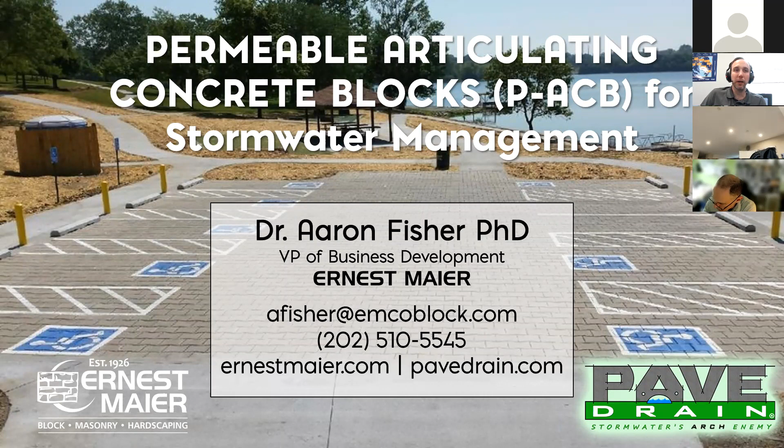My name is Aaron Fisher. I am the Vice President of Business Development here at Ernest Maier. Today's talk will be on permeable articulating concrete blocks for stormwater management. This is a tool that should be in your toolbox as you look to address stormwater challenges as part of your site plans, as part of your stormwater management plans. If you're not looking and thinking about permeable articulating concrete blocks, you should be.

I'd like to start though quickly with who is Ernest Maier. As our tagline aptly suggests, we are more than just blocks. So if you know us as a masonry supply house, we certainly do that and do that well, but that is not the only thing we do, and that is not the only place. We've expanded well beyond our Bladensburg headquarters, all up and down the mid-Atlantic, out to Charlottesville and out to the beaches, operating under a few different names.

We do everything now from ready mix concrete, to precast concrete, to brick masonry, to hardscaping, to one of our latest products we just picked up, fiberglass rebar. You might think that would be more expensive, but it's actually cheaper right now than steel rebar. It's a superior product at a lower cost. So if you're concerned about corrosion, or any of the things that happened in Florida last year unfortunately, where corrosion was the problem, a rebar that does not corrode would certainly be one way to solve a problem like that. Any of those products, anything that interests you, please feel free to reach out. We're always introducing new products, not just because they're interesting or exciting, but because they're better, they're more sustainable. That's how we got into permeable articulating concrete blocks, which we sell under the name Pave Drain.

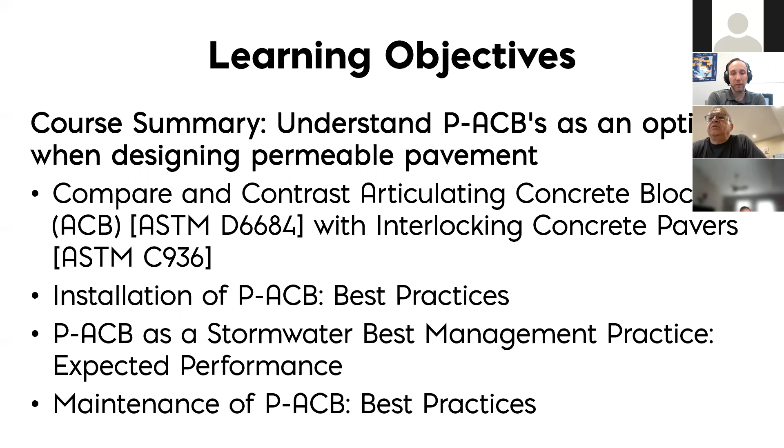I also like to talk about the learning objectives. This is the last introductory slide, so what should you walk away with? Understanding that P-ACBs, permeable articulating concrete blocks, are an option when designing permeable pavement, but also an option when you're thinking about addressing your stormwater challenges. First I start out by comparing and contrasting what an articulating concrete block is to an interlocking concrete paver, which is probably the product you're most familiar with. Then how best to install this, what you should expect in terms of performance, and then maintenance. This is really the big one, so we save it nice to the end, hopefully you stick around to hear that piece.

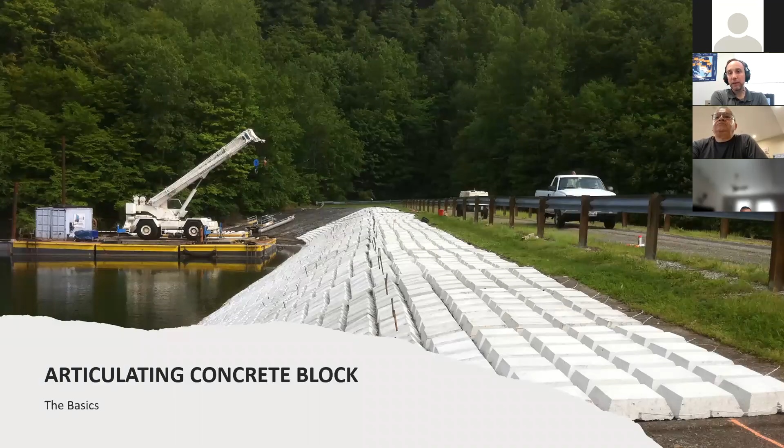Starting off with the basics, what is an articulating concrete block? It is a matrix of interconnected concrete block units. They interlock in one of three ways: either based upon the geometry, so the shape of the block, cables, so that's a system that runs through the blocks, or geofabric, so something that kind of sits on them. Think of it like a Lego board, you can kind of plug them in. The key thing is they form a hard yet pervious surface via open joints. That open joint is really the key thing here. That joint is how the water gets from the surface to the soil and ultimately back into the water cycle.

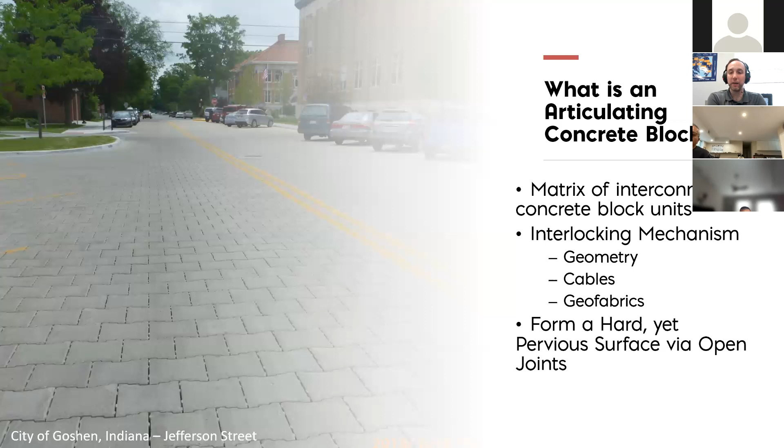So there's a difference in thickness. An articulating concrete block is about 5.5 inches thick. A paver is between 2.5 to 3.25 inches thick. So there's a little bit of difference there, but they're similar, not far off. They're both made from concrete, so any color you can make concrete, you can make a paver, you can make an ACB. They both form that hard yet permeable surface to prevent erosion.

I will stress that when the systems fail, it is generally not exactly the surface that's causing the problem. It's the things below the surface. So compaction, geofabrics, that are all really critical to making sure that the system performs like you're expecting.

And then finally, that stone base, that's really the stormwater structure. So the gravel underneath, the stone underneath is actually what holds the water and allows it to infiltrate into the soil. That allows you to disconnect from the stormwater system and allows the stormwater to actually go back into the natural water cycle where it would in a distributed fashion.

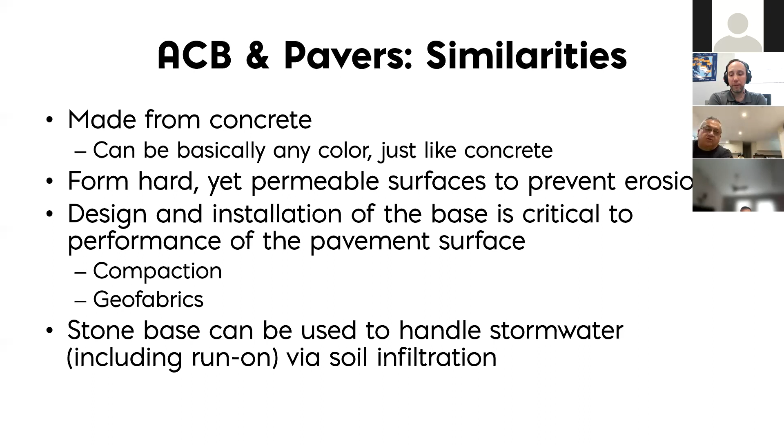But why are they different? So the answer is 2 different ASTM standards. So if you do specify an ASTM standard, you do scope out ACB systems. So please be sure to give it kind of an 'or equal.'

The joints, this is really the big one. ACB systems have open joints, so there is no material in the joints. There's no sand, there's no stone, there's no crushed rock, nothing in the joints. Whereas pavers require material in the joints. This is really big because this kind of changes how much water they take on, but also changes how maintenance is performed, how they clog. All of those kinds of things change pretty dramatically when you have the joints filled, which we affectionately call that pre-clog. So that really starts the clogging process.

Additionally, the ACB systems are interlocked. They're always interlocked, that is how those systems are set up. Pavers are sometimes interlocked, and that's when you have a herringbone pattern that generates that interlocking, and is generally recommended when you have traffic applications. So when you have cars driving on them, you do need that additional strength from that.

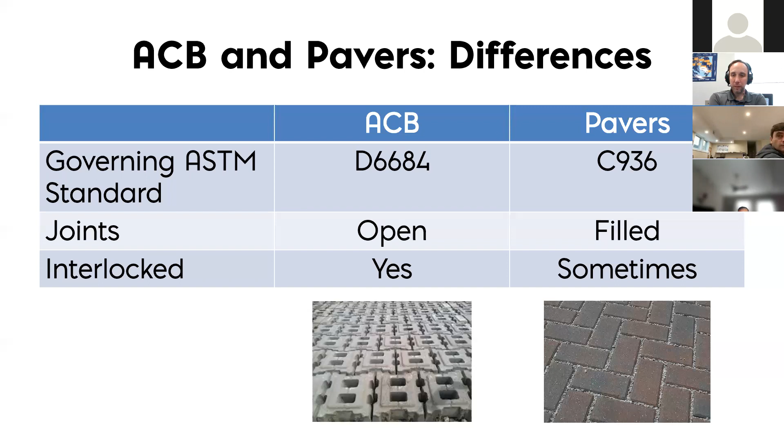So the difference is open joints may not seem like a really revolutionary idea. We really think it's not, but it generates a lot of different performance characteristics. The blocks tend to be stronger because they're much bigger. Because there's a little bit more material, there's a little bit of a higher price point to them, but you certainly gain in the long run in terms of maintenance very quickly.

Performance-wise, these systems perform much higher initially and then perform much better over the whole life of the project, even in the absence of maintenance. When you do have to perform maintenance, it is much simpler, it is much easier, and generally results in restoring significant performance back to these systems that greatly exceeds what you would get from an interlocking concrete paver system.

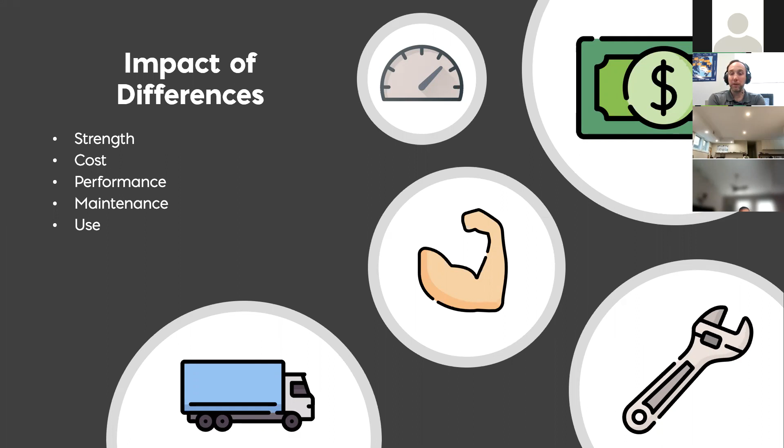And ultimately the use case: ACB systems can be used under heavy traffic loading. You can put them in a drive aisle, you can put trucks on them, you can put cranes on them. We have a whole bunch of pictures for this and we'll stress that and talk through that.

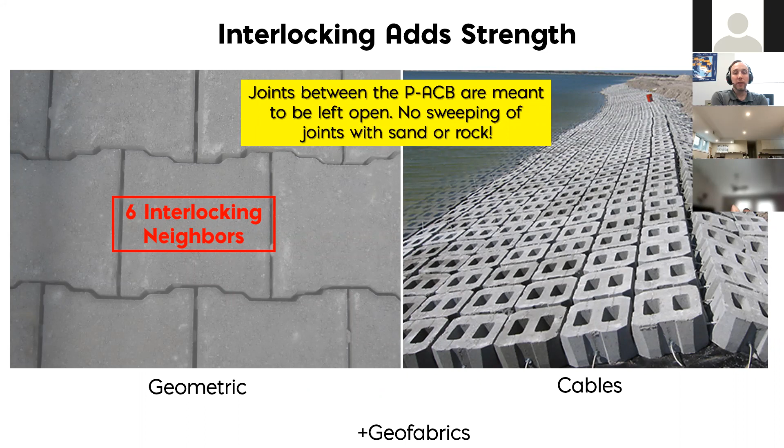I will also note the interlocking adds strength. So the joints between the P-ACB systems are always meant to be left open, no sweeping of rocks, no sand, nothing in them. And really this increases the strength across the system, which results in a really great performance when you're thinking about traffic loading. Traditional interlocking concrete pavers are not recommended for anything over very light duty kind of parking applications, whereas a P-ACB system can be used for heavy duty traffic.

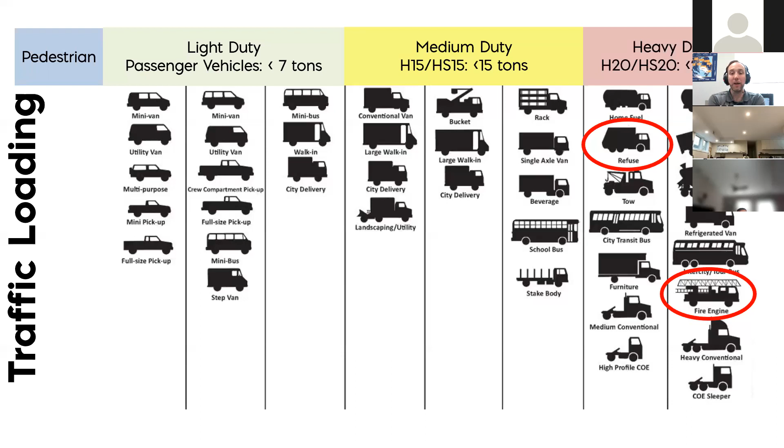So things like a trash truck, fire engines, all those kinds of use cases. It's not really hard to imagine a use case where a fire engine's driving on the system, but I don't want to be in front of a fire truck when they're there to fight a fire and say, no, you can't park here, even though it's the closest place, the nearest point to your fire department connection — you've got to park over there because you're going to ruin the surface. There's nobody who would ever do that. So it's best to build a system that accommodates how people are actually going to use their roadways, how they're actually going to use their hard surfaces, and build a system that allows for that.

Additionally, it can be used in roadways. So on the top left, going clockwise, that's actually a turn aisle in the middle of the road. Next to that, you can see they put it along the shoulder on a roadway in the upper Midwest. On the top right, an intersection done with it, in PG County, Maryland, in Colmar Manor. In the bottom left corner, that's actually a bike lane, so this surface can handle bikes. And just above that, closing the loop, a roadway where they put it on the shoulder again to manage runoff from the roadway.

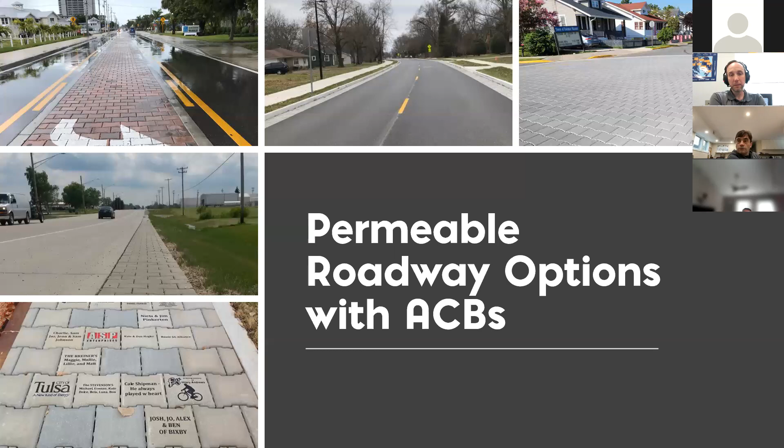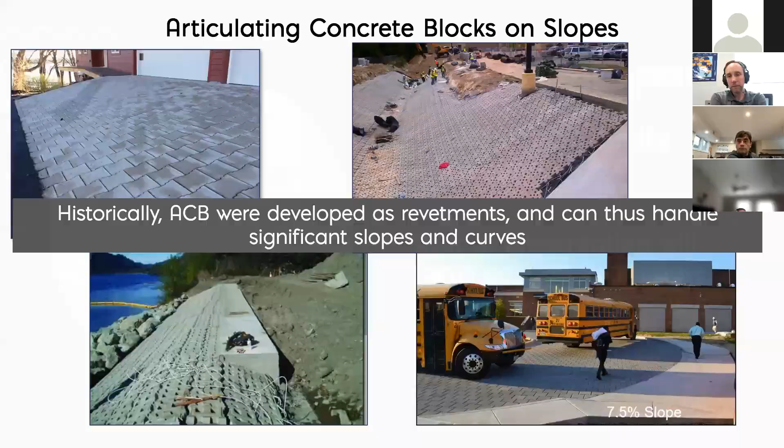The other big thing, you can put them on slopes because they were historically designed as revetment systems. They can handle significant slopes and curves. While this is an option, it does impact how the stone base functions, because the water itself will level out underneath it. So you will need a terrace and put in some kind of weirs underneath. But ultimately, you're able to put these in a lot of places where you wouldn't put a traditional interlocking concrete paver.

Going forward, I wanted to stress we're going to talk about things that are ADA compliant. So you saw a few systems here, some ACB systems that are not ADA compliant, because they have openings more than half an inch. The systems going forward that I'm going to talk about have openings less than half an inch. In fact, in most cases, about a quarter inch is the spacer in the system we regularly sell, the Pave Drain system - that's a quarter inch between them.

So I have a little question here: do permeable ACB systems have filled or open joints? Feel free to chat that in.

Happy to see that everybody - just wanted to see if people are listening here. Tyler's the quickest with his fingers there. Well done.

Yes, seems everyone paid attention to the one point I was stressing, that they have open joints. This is really big. I will note, just to pause and say, you cannot take a traditional permeable interlocking concrete paver and just take the joint material out of it. If you do that, the system does not function correctly. It needs the tension, it needs the compression along the surface that the joint material provides. And so while we would love them to do that, the way traditional permeable interlocking concrete pavers are designed, they need that compression along the surface, they need that joint material to actually lock the bricks and blocks together to hold them in place.

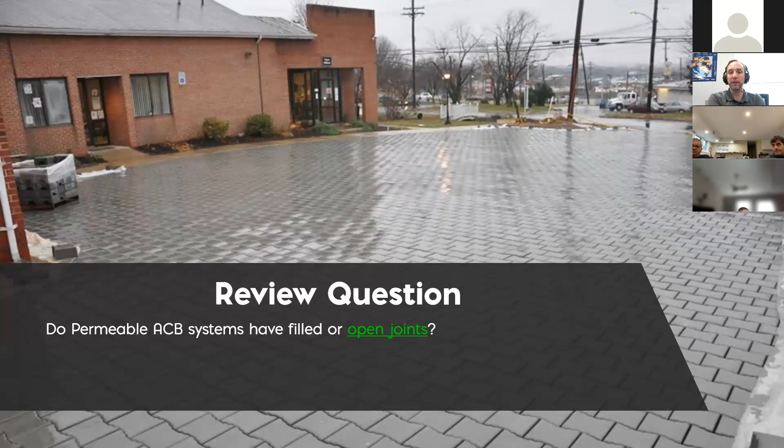And that's a pretty unique aspect of articulating concrete blocks and permeable articulating concrete blocks relative to other permeable pavement options. I'll stress that articulating concrete blocks, as I mentioned, began life as erosion control systems, and then we advanced them to the point they're pavement. So there's things you can now drive on, versus every other permeable pavement - porous asphalt, pervious concrete, permeable interlocking concrete pavers - they really began with a pavement surface and then poked holes in it to allow water to go through it. So you kind of get back to a similar point, but because they began from different places, we're going to see that there's benefits to having begun and recognizing that water is going to go where it wants to go, and starting from that point.

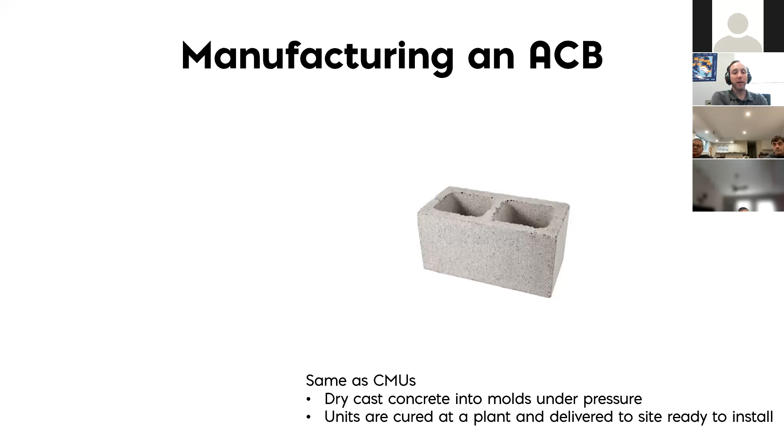So now that you've seen what the system is, how do you install it? Best practices - this system, an ACB, is manufactured the same as a CMU, a concrete masonry unit. They're dry cast into concrete molds under pressure. The units are cured at the plant and then delivered to site, ready to install.

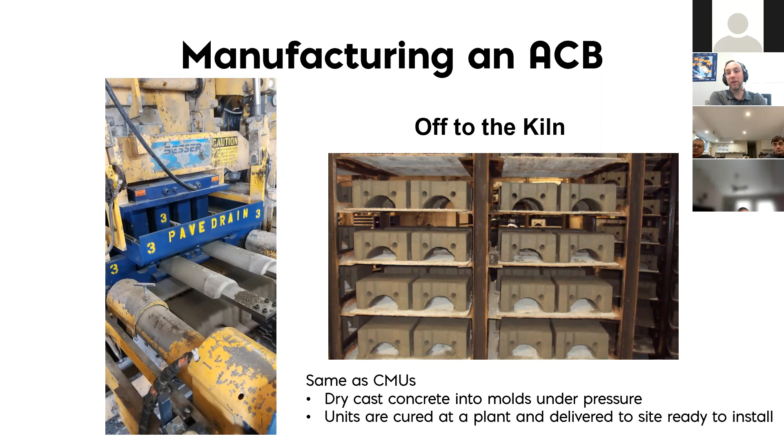Now, once you've gotten your finished block, what do you do? We start with the installation sequence. And so, as any good construction project, it begins with the plan. Planning out the system is really important.

Step 2 is placing and compacting the base, including geofabrics and geotextiles. Number 3 is placing the blocks, and this is where we kind of throw people a little bit. Number 4 is actually placing and paving the adjacent asphalt or concrete. There is no need for a ribbon curb with this system. These blocks are interlocked and held in place both by their own weight and the geometry, and they can actually serve as the form or edge for the asphalt or concrete being poured next to it. This is not like any other permeable pavement system, so we note that.

Right beneath them we bed it on 57, so 3/4 inch gravel. That's different than most other systems that bed it on sand. You can bed it on sand, but there's no reason to. You get additional volume and void space by using 57 gravel. If you need additional stormwater capacity, we recommend using number 2 stone below the 57.

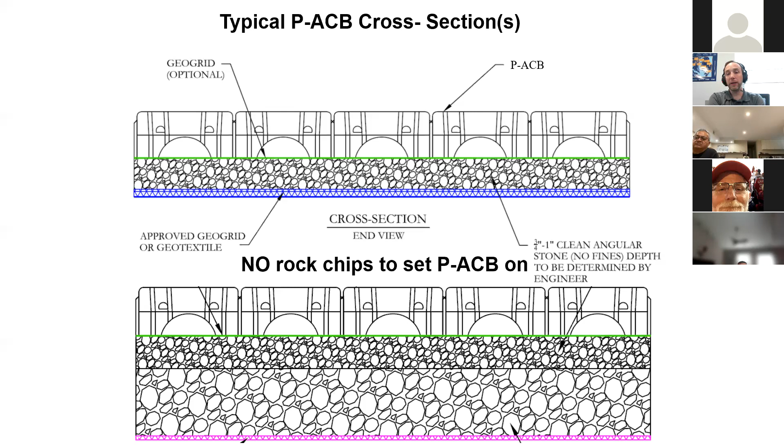And then finally, at the interface between the stone base and the soil, we recommend an additional geogrid or geotextile, specifically a woven monofilament. This allows water to go through but provides structural stability. I'll stress that geotextiles and geogrids really are great things to specify and not skimp on, because when contractors do their work, good geotextiles and geogrids can accommodate and patch over a lot of the shortcuts or failures they encounter in their construction methodologies.

So I put a slide here on geotextiles. I'm happy to talk about this more, but choosing the right geotextile is really important. Not all geotextiles are the same, even though they fall under the same broad class. Things like non-woven fabrics are like your landscape fabrics for weed control - they don't add structural strength. If you use them thinking you're providing structural strength, it doesn't do anything.

You also have your slit tapes, your woven ones, which are usually for erosion control. Again, that will apply structural strength, but won't allow water to go through, which defeats the purpose of using it as a stormwater BMP. There are all other types, and choosing the right type is really important. We're happy to pass along our specs that we've learned the hard way - hard-earned specs that we recommend. Either we're pretty confident in what we recommend, or you can use an or-equal if you're comfortable using someone else's product.

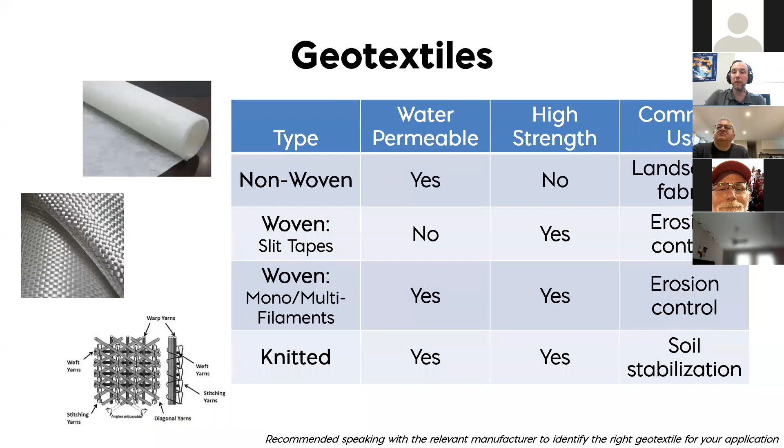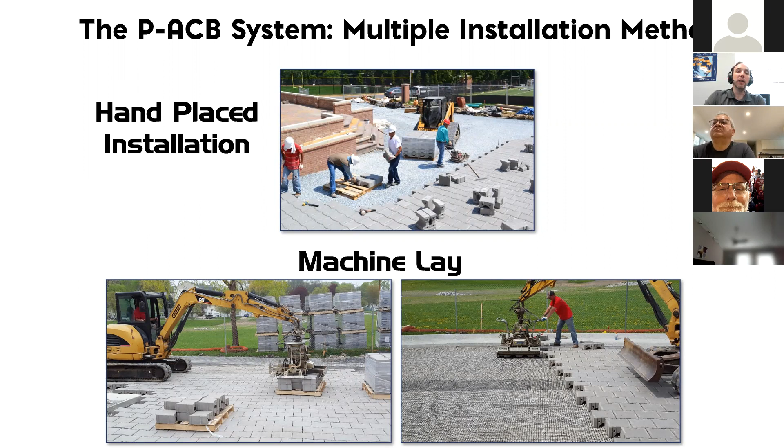After you've layered down your base, put it in lifts, and compacted each of the lifts, it's now ready to place the blocks. You can either place it by hand, as you can see on the top, or you can machine lay it. I have a nice video here you can see of how the machine lay goes.

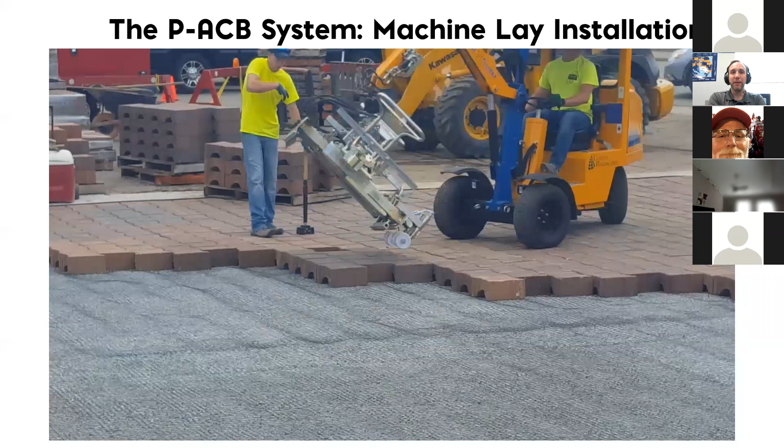Not sure if you can hear the sound, but it's just construction noise. What you can see here is 11 square feet at a time being dropped into place. And then they make sure they're all lined up. And then the gentleman puts in that last block, that missing block right there.

Putting them in is quite easy, and this is a really great way - the machine is great if you're doing large areas. If you're doing smaller parking stalls, the hand lay is plenty efficient and a good use of money.

So on sequencing, you can see the compaction and the blocks are placed, and now they're ready to pave the adjacent asphalt right next to it. You can see here they come in and pave right up against it. The blocks are built heavy enough to serve as the form, so this is really a cost-saving mechanism. You don't have to pour the ribbon curb, then place the blocks, then place the asphalt. You skip a whole step in the process, which is ideal for saving money and results in a superior pavement surface.

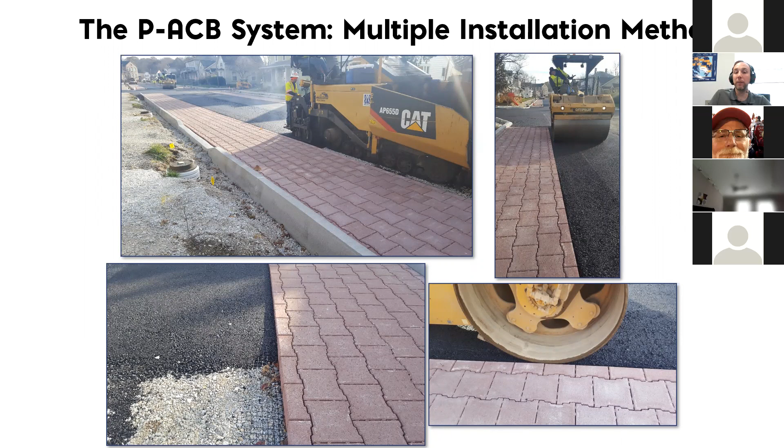I'll show a couple of different installation methods. There is no ribbon curb required, though you can place one if you want. We see a lot of people are comfortable doing it that way, but it's not required for this system.

One of the other big benefits of the P-ACB system is when you get to curves. This is where the contractor usually has to pull out their saw, cut down blocks, and round them off. But the P-ACB system is so good at handling water that the additional square footage isn't worth the hassle and cost of cutting blocks to fit the curve.

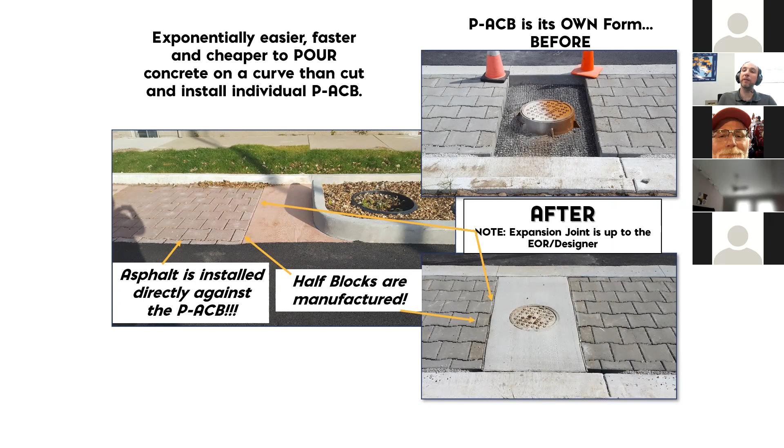So what we recommend is squaring them off using half blocks and side blocks to create a nice edge. If you have something like a sewer manhole cover, you can see the round thing, just square it up and fill it in with concrete. That makes it a lot easier with minimal block cutting, so you're not dealing with any of the hassles or OSHA requirements around cutting and dust creation.

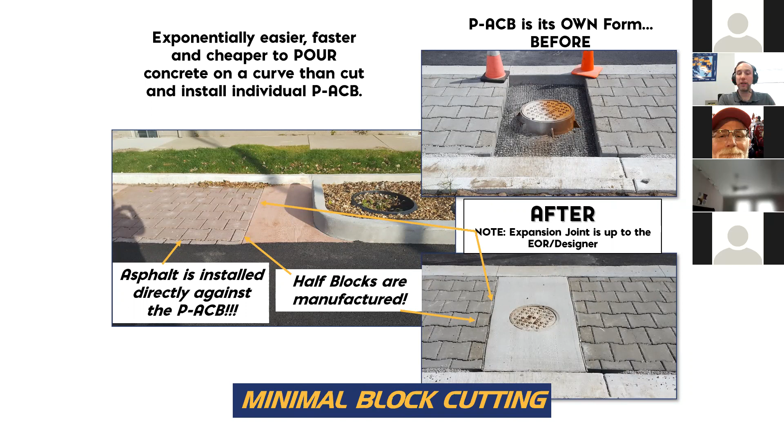The contractor moves a lot quicker because it's usually not hard to place big surface areas. It's when you get to the edges that they really spend a lot of time, and that's where the money adds up quickly.

The other thing we've started to see is installation benefits. Looking at a traditional street versus a street with P-ACB incorporated, you don't have inlets, there's no ribbon curb, there's the sanitary pipe, but no stormwater assets.

They're easily repaired. If a block breaks, you can take one out and put it back in. If you need to get underneath the surface to reach buried infrastructure, you can take the whole surface out, set it aside, dig down, excavate the stone, do your repairs, put the stone back, put the blocks back, and no one's the wiser that anyone went underneath the surface. No patching, nothing like that is left behind.

We actually had an installation at Ford Motor Company - one of our earliest installations. They've been plenty happy with it, but they needed to redesign their parking lot, so they moved it to the backside of their lot. They basically picked up the P-ACB installation and moved it to a different location.

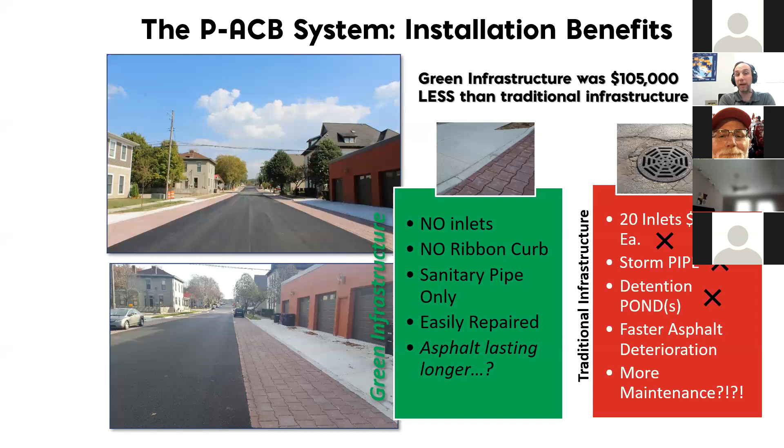By not having these stormwater assets, you're saving a fair bit of money. Additionally, we've started to see circumstantially that the asphalt adjacent to the P-ACB strip lasts longer, because asphalt wants to expand and contract with temperature changes, which ultimately results in potholes and cracks. But the P-ACB, because of the open joints and because it's handling all the water, has shown a lot less cracking and a lot less repair needed on the adjacent roadway, which is really a big plus.

And Patrick, I see your question. That is a detailed question. I will be sure to address that when we get towards the end.

Yes, before - a lot of befores. Everybody was paying attention. Okay, excellent, before it is indeed. That is the recommended installation order of operations: placing the blocks before you pour the adjacent concrete or asphalt.

So I'm going to jump into the third part of this. The third learning objective is around stormwater regulations. And this is really a big one.

We have stormwater regulations because we as humans have decided to change the environment. We like impermeable surfaces, we like to walk on things, we like to drive on things, we like them to not be mud. Problem is, when we do that, it changes the hydrological properties of the natural environment. So we've created all these regulations to account for the fact that we really like roads, driveways, sidewalks and walkways, and we've put them in place to manage flooding, runoff, and other issues that come along with it.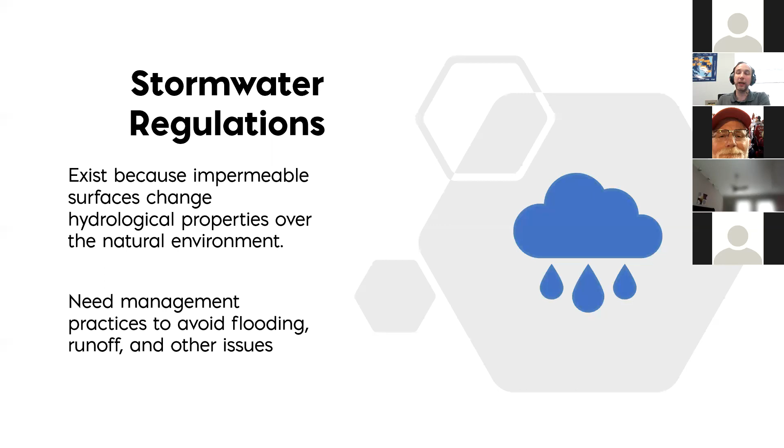Critically, what we've kind of failed to do is create these massive assets, these massive structures. In reality, one of the better ways to address this is to solve the problem where you create the problem, in a distributed fashion. We think this is one of those great ways to do that without necessarily having to make the whole area a permeable pavement. But I like to start with an infiltration demonstration.

So what you can see here is I was trying to mute the sound. My bad, let's take that down. Start this over. What you can see here is a fire truck from the city of Bladensburg, parked on top of a P-ACB system.

And what we did was take the whole fire truck and dump all of the water out onto the surface itself. What you can see here is that basically as quickly as we can get the water out of the truck, it is down into the P-ACB system.

In total, about 550 gallons went in over about 75 seconds. Really, the water doesn't run any real distance any which way on the surface - it pretty much falls instantly right into those joints. This is a 78,000 pound fire truck that's sitting on there.

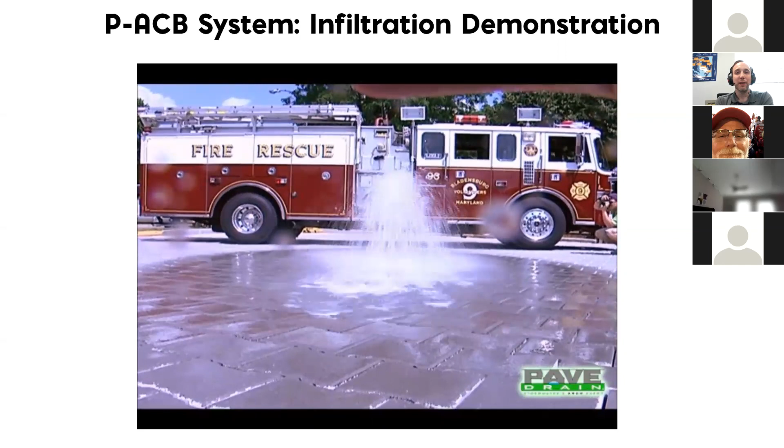And this system, we are proud to report, has had no maintenance done over 10 years. So it really is performing like this without any real work or maintenance being done to it. You can see that it takes on a lot of water as it goes, and that's pretty much it.

So, no maintenance after 10 years - it's quite impressive in terms of its ability to take on water. But we like to compare it to other systems to help you understand how this is different than any other system you're used to.

So what we talk about is surface infiltration rate - this is not the soil infiltration rate, this is the surface infiltration rate. Because of these open joints, we have really high infiltration rates.

So what we did was hire an engineer to go around the city. The test that resulted in 1,600 inches an hour was on a system that had been installed in the ground for about a year or two. We picked out, again, porous pavers that had been installed for about a year or two, porous concrete installed for a year or two, pervious concrete, and porous asphalt.

Long story short, the difference between a P-ACB system and all the other permeable pavement options was pretty dramatic. They really weren't performing up to the 8 inch per hour requirement that MDE has for something to be considered a permeable pavement.

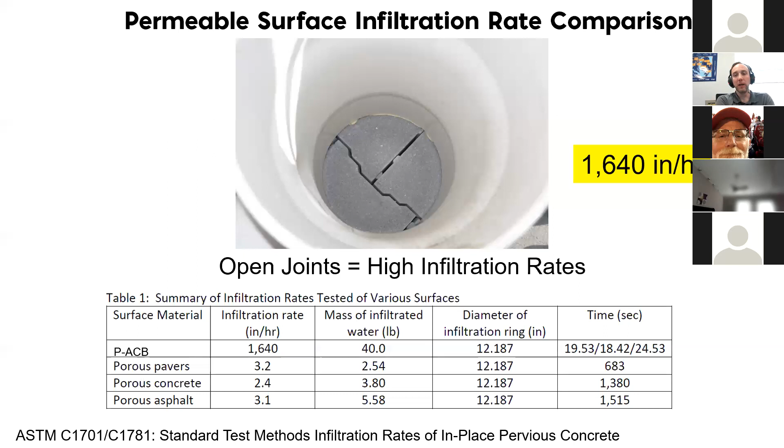But now that I've convinced you that the surface can take water, the other part of the equation is how fast the soil takes on water. Soil infiltration rates - a high soil infiltration rate is around 1 inch an hour. So even though we could get 1,600 inches into that, it wouldn't be very helpful if the soil couldn't ultimately hold it.

And so what we've had to do is come back and do a lot of sensoring and gather a lot of information in terms of how it actually performs. What we've done is replace one of our blocks, the one in gray here, with a water level logger.

So as the water falls in, the base kind of fills up and we track that. And as the water exfiltrates from the base and goes into the soil, we watch the water level logger fall. This system did have an underdrain in it, but we put a valve on the end, so basically turned it into an overdrain.

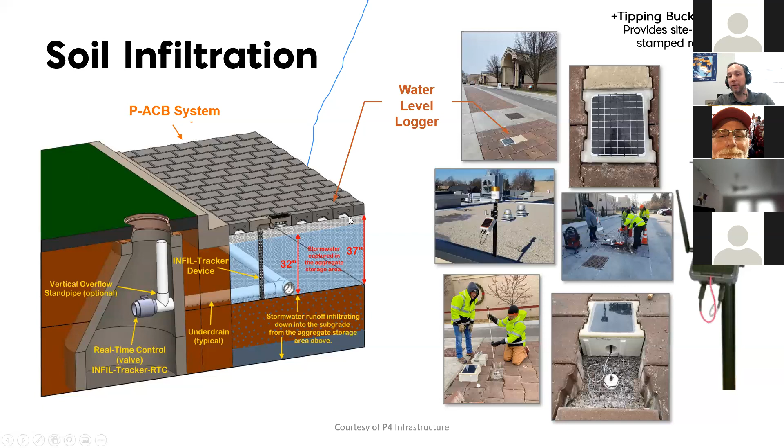So as long as there were less than 37 inches in this base, the base was holding water. We did this up in Cudahy, Wisconsin. I don't know what this drawing is on my slide, sorry. There was a rainfall event, and a P-ACB system was installed in an alleyway.

The run-on ratio from this area was 33-to-1. That means for every 1 square foot of P-ACB permeable pavement, there was 33 square feet that ran onto it. Another way to think of it: for every inch of rainfall, 33 inches actually went to the base, to the system.

The soil infiltration underneath it, the soil was clay. So per USDA standards, that should infiltrate about 0.04 inches an hour.

What you can see here is in red and green, blue - sorry, I'm really having a colorblind day here. You can see there was just over a 2 inch rainfall event. The 2 inches fell pretty quickly within about a 6 to 8 hour period, and then you can see it tapered off. But what you can see here in red is actually the water level logger itself.

So immediately as the rain is falling, it goes into the base. It does not overflow. And then very quickly infiltrates back out. In a day and a half, it's actually completely empty again.

Comparing that to the initial infiltration rate, so when the base was full and you had the hydrostatic head on top of the water in the reservoir, you're seeing infiltration rates north of 1 inch an hour. Overall, over the whole system, incorporating this long tail, you're seeing infiltration rates closer to about 0.4 inches an hour. That's a really dramatic difference.

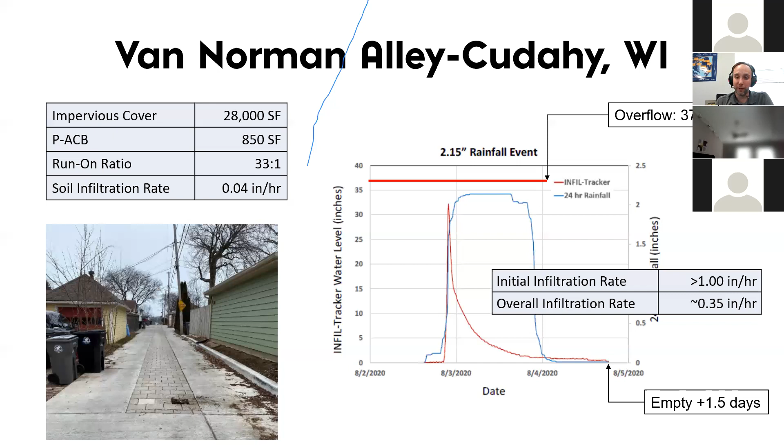It follows the pathway of least resistance. It goes through the sand channels, and obviously there's only so much - it's not all sand, but it goes through the more porous soil and gets quickly back into the system. So over a large area, it's able to infiltrate. You're able to use the heterogeneous pathway, the three-dimensional pathways for sand seams, and that takes the water on very quickly. We've seen this over and over again, and we're actually doing a study right now.

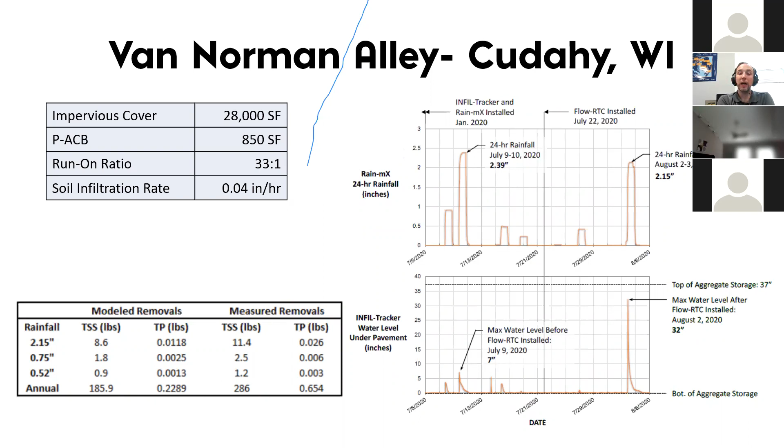This study was done in Wisconsin. We're actually in the middle of a study with the University of Maryland in Prince George's County to help reinforce it. But really what we're seeing is overly conservative soil infiltration rates in our stormwater permitting are actually limiting how we allow the stormwater BMPs to perform, and ultimately causes us to either over-design our stormwater assets or improperly rule out things that could be or should be done.

Over and over, we've seen the data from these systems show that the soil infiltration rate is significantly elevated versus what we were expecting. Why do we think the regulators did that? It's because the surface itself was starting to fail. The permeable pavement surface, whether it was pervious concrete, porous asphalt, or P-ACB, that was actually limiting the factor. The water couldn't get down into the base quick enough, when in reality the base was functioning quite fine.

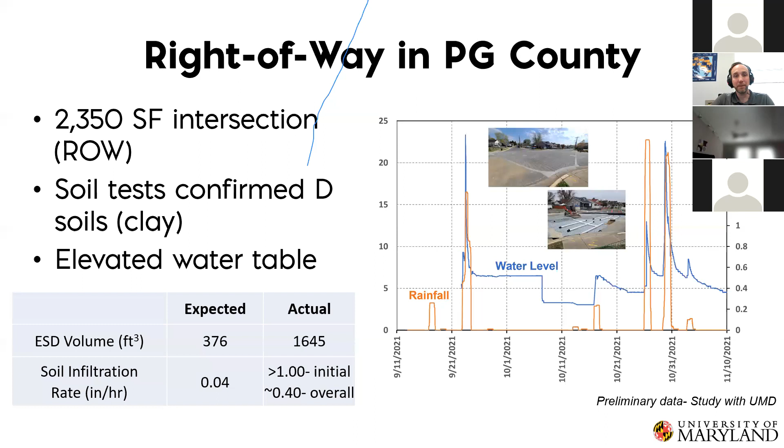So decentralized stormwater management, I'll stress that a lot. I think that's really the best way to address this situation. If you're creating a problem, address it at the source. Where is the source of the problem? It's our love affair with hard surfaces and impermeable surfaces. All right, let's turn those into permeable surfaces.

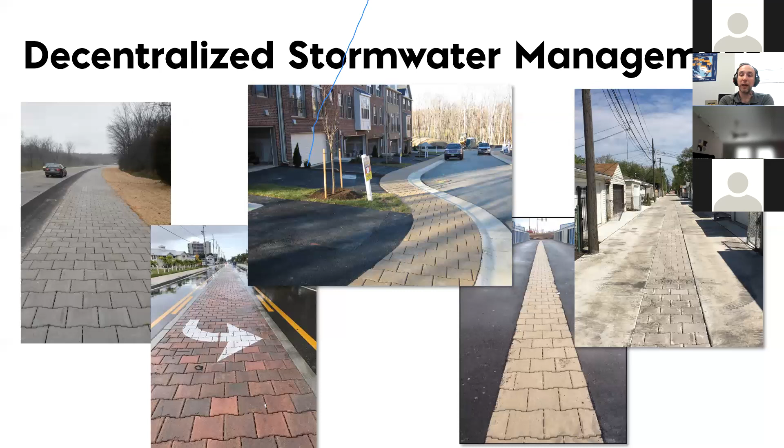The beauty of using a P-ACB system is you don't need to take the whole roadway and give up your asphalt. You don't have to give up your concrete roadways. You don't have to give up your sidewalks. You just need a little bit of a strip, a little adjacent space, and you can handle significant amounts of run-on. And because it's handling the run-on, you don't need it everywhere. You can put it in lower trafficked areas, or on sidewalks or adjacent to stuff, and really address the stormwater challenge where it turns up.

Again, there's potential for LEED credits here - from rainwater management, heat island reduction. By using a lighter surface, you can protect or restore habitat, because you're not creating these artificial green infrastructure structures, stormwater structures adjacent. You're allowing the natural environment to stay natural. There's a really big thing to that.

Certainly in tighter site plans, we need engineered structures. We need engineered green infrastructure. But having this option in your toolbox is really important.

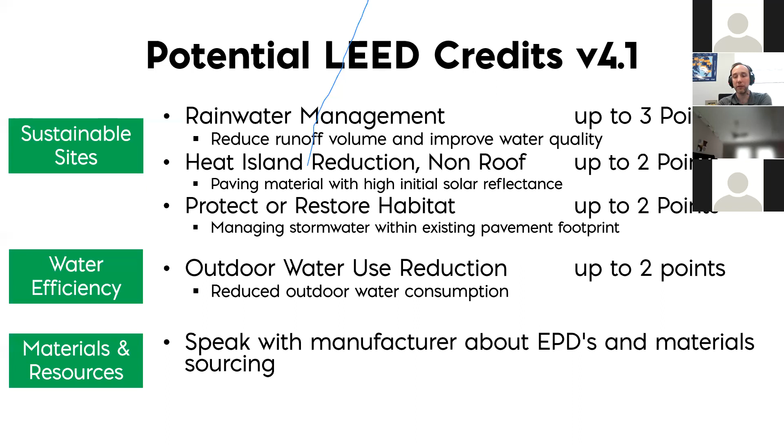Just one last performance question here: what is the observed surface infiltration rate of a clean P-ACB system? Is it A, 1.6 inches an hour, B, 16 inches an hour, C, 160 inches an hour, or D, 1600 inches an hour?

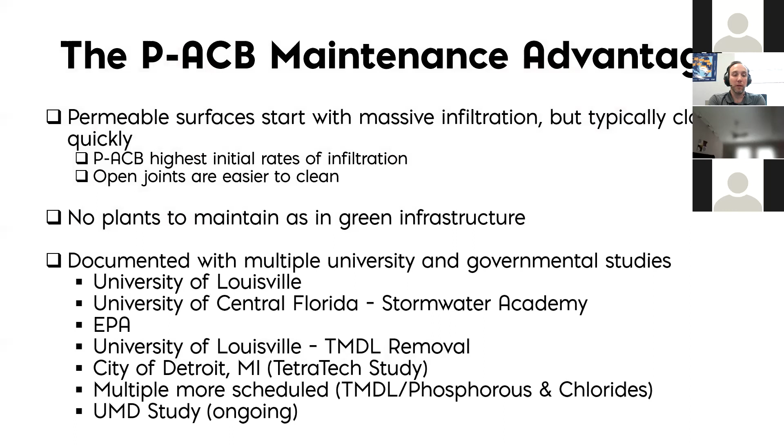There's no plants. There's nothing living in them. So the plants stay where they are. The green infrastructure, the softscape, stays where it should. And we've documented this with multiple university and governmental studies.

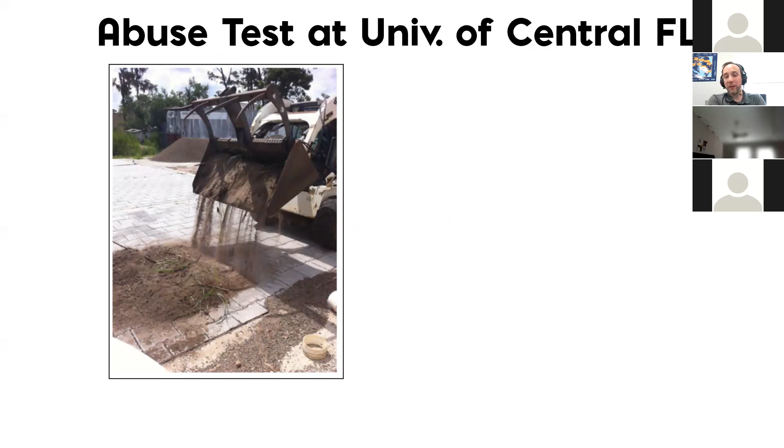And that's where I like to start, is with the abuse test. We did everything we could to clog it. We went down to Central Florida, we dumped some sand, we poured some water in, we baked it. That system is clogged - it does not perform anywhere near 1,600 inches an hour.

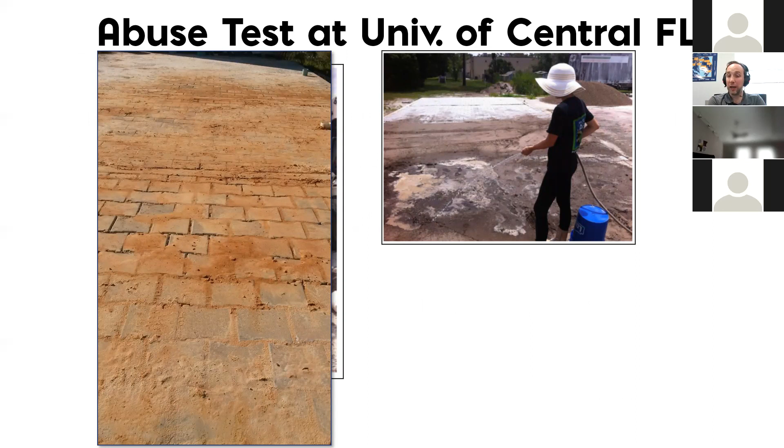But performing the recommended maintenance, we were able to bring back 90% of the original infiltration rates. We were back closer to 1,500 inches an hour. That is the maintenance that can be done at any time. That's the only maintenance we recommend - there's only one maintenance thing. It's just suck everything that's in the joints out, and you're able to restore the performance that you originally had expected when you installed the system.

That is absolutely wonderful. It's the best way to do it. The only way to kind of get back to that with any other system is to completely rehab or replace the system with any other permeable pavement system. Now to convince you it's possible to do maintenance, we went through and did a little bit more on regular standardizing the maintenance guidance.

So how should it be maintained? When should it be maintained? How to do it? We went through a few different strategies to get to that test result you see in the abuse test.

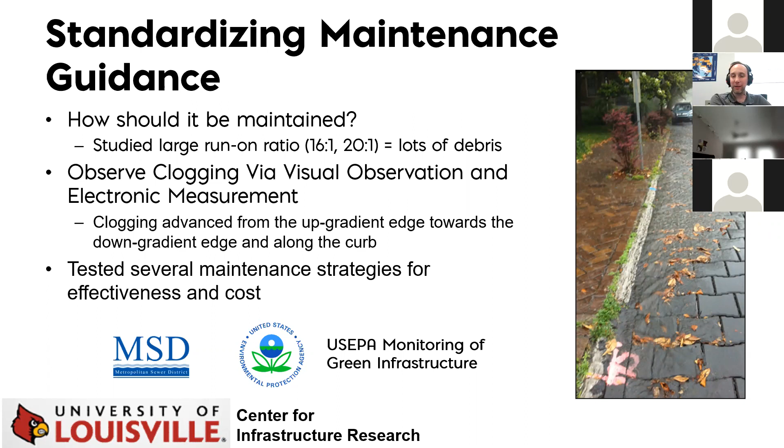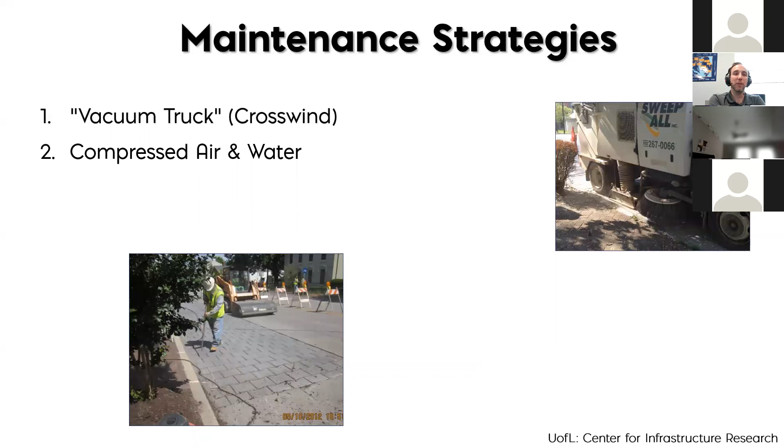We actually did this slightly before. We went through and evaluated three different maintenance strategies: using a vacuum truck, compressed air and water like an air knife, and then a vac head and combination sewer truck.

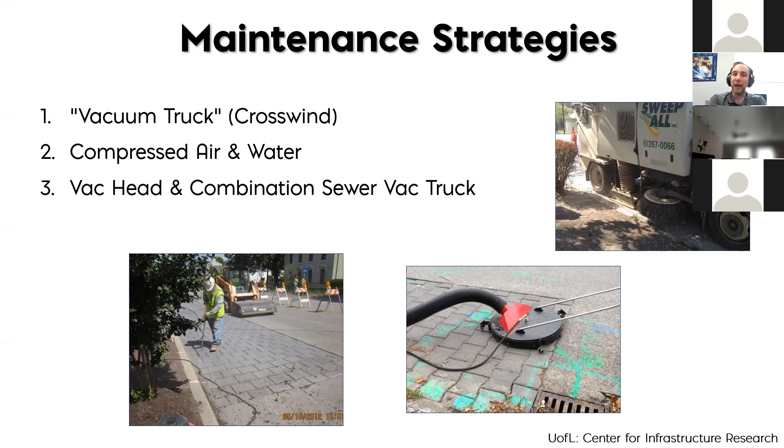This is putting a little bit of pressure water in and then also sucking it back out. As you may have caught from my previous slide, what we did with the abuse test, we recommend that strategy.

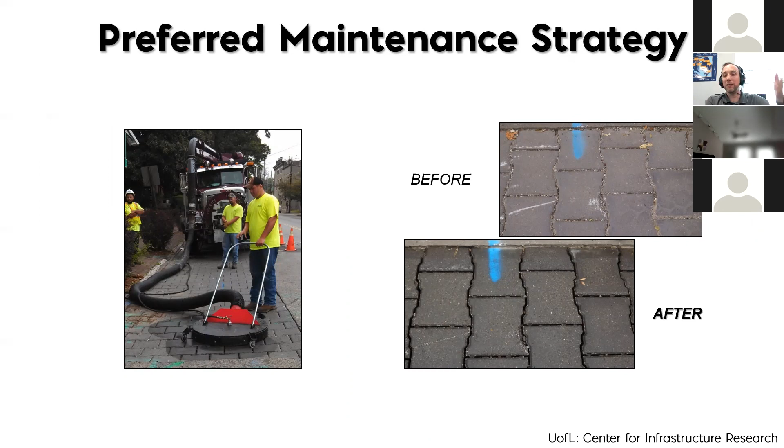You can see here what a clogged system looks like. It is visually clogged, you can see it in the joints. You could stick a tape measure in the joints and it doesn't go down anywhere. But after having been done, you can restore nearly the full depth of the joint system. Everything that's in the joints should not be in the joints.

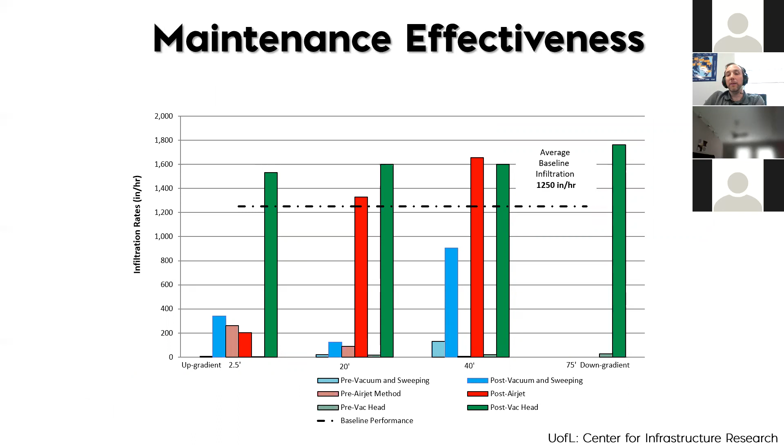From a maintenance perspective, all these bars are telling you is the green bars basically show we were able to restore just about everything we needed. There were a few other maintenance strategies that do work, but the one we recommend is the vac truck combined with the vac head.

So pressure washing combined with the vacuum feature. And really, can you do the maintenance effectively?

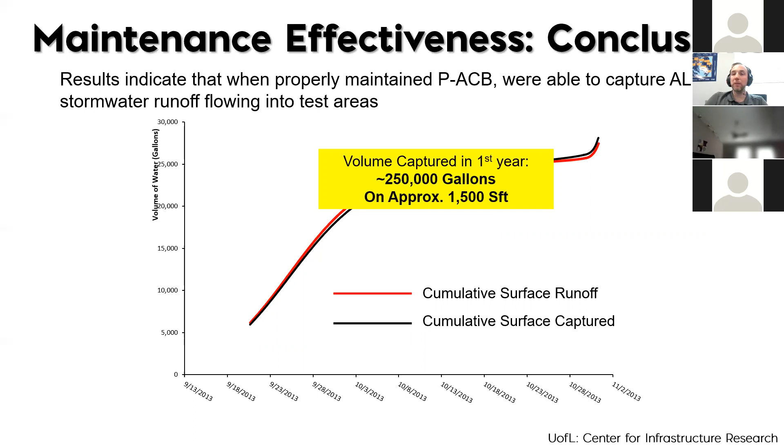The city of Louisville, what they were able to demonstrate here was that they were able to capture all of the water that they thought they should capture. The red line and the black line are basically on top of each other, which means that they did the right maintenance. They did it when they observed it was clogged, and were able to capture all the water they expected to capture in the system.

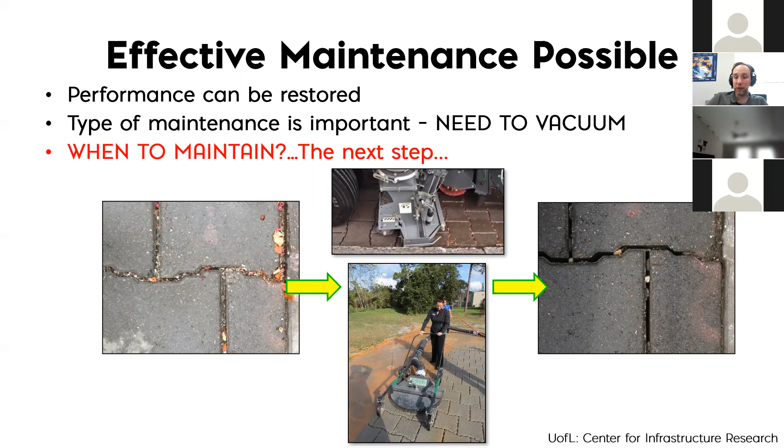The next question is, when do you maintain a system like this? Obviously when it's visually clogged that's a pretty good sign, but it doesn't necessarily need to be done by visual observation. You can do it based upon sensors.

We did a nice sensor test here, and as you can see, they clog in a very linear pattern. The water flows on, it drops some debris, and then it proceeds to keep clogging down further and further as the water moves down. Your sensors are able to tell you how much water they can take on, how much water they should be taking on, because you know the effective run-on ratio. So when that water doesn't come in when it should, then it's time for a maintenance cycle.

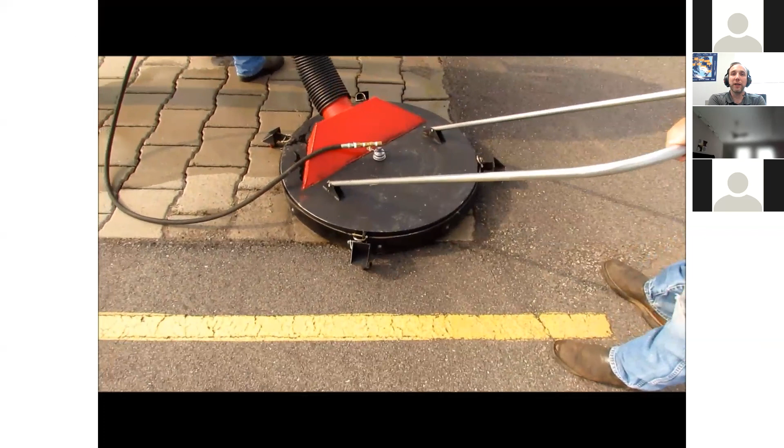I'm just going to show that vac head here so you can see what's underneath it. You can see the hose is connected to a vac truck, and the smaller hose in the middle is for water. So what it's doing is shooting down water from these spinning heads. We'll tilt it up in a second so you can see it.

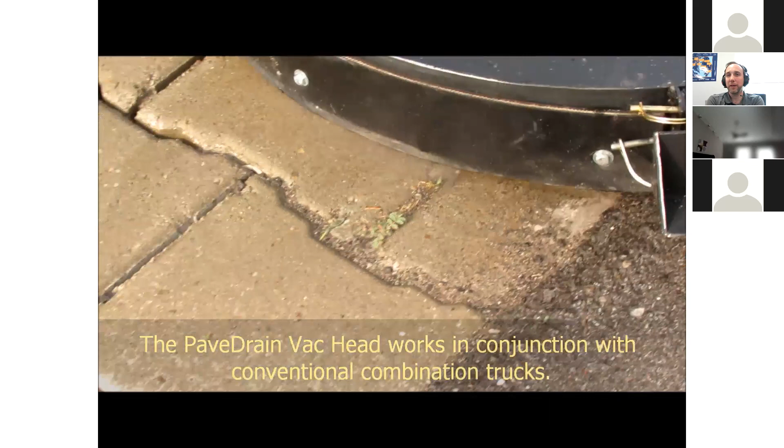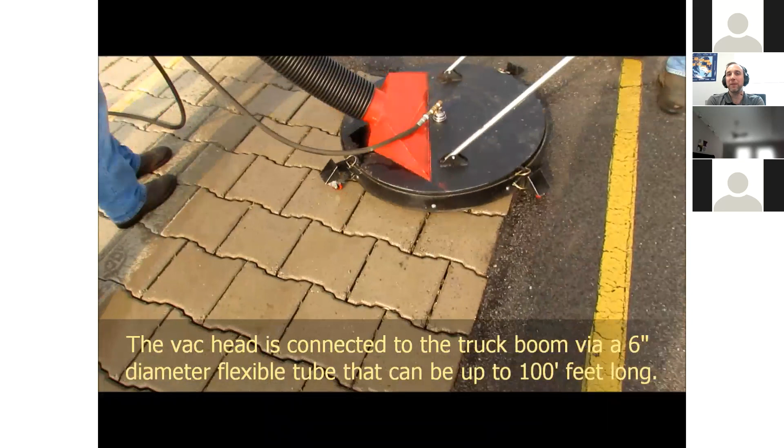By passing it over this, it basically knocks all the debris loose that's in the joints. And then what you can see effectively is pretty much the joint looks almost empty underneath it. It's really quite amazing, it's quite a simple idea.

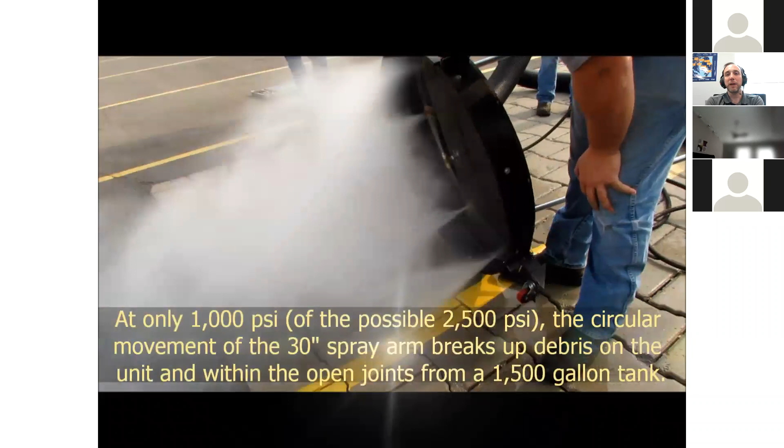We kept getting asked this question, so we actually designed this piece of equipment ourselves because we figured everything else we've seen in terms of maintaining permeable pavements doesn't work effectively. You can see the spinning wands that break up the debris, and then it's sucked back up into the truck, into the vacuum.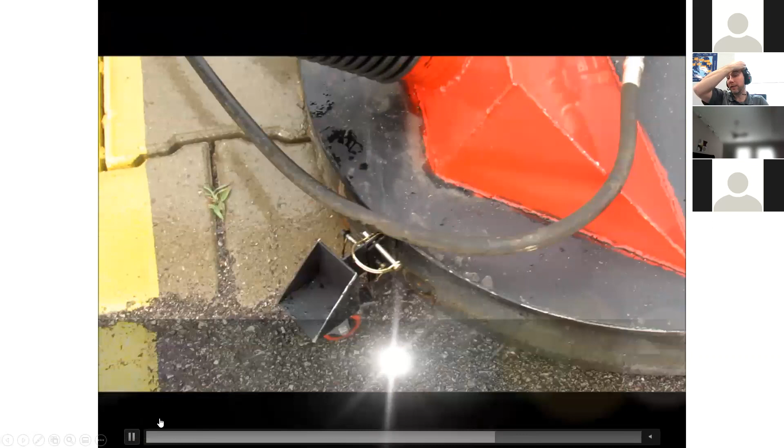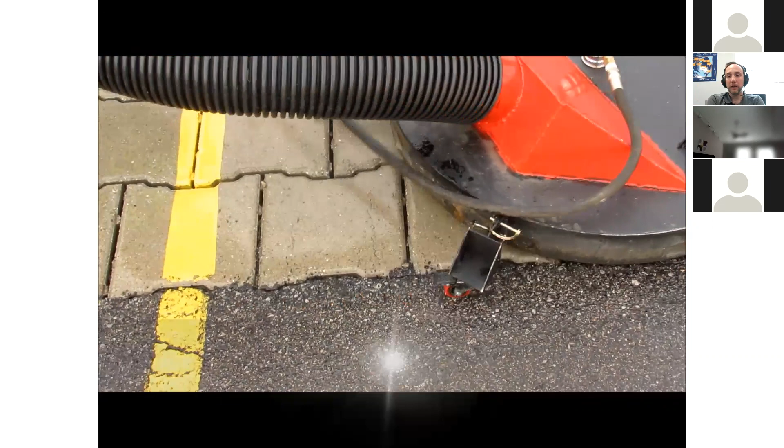You can also use the vacuum truck itself directly, like an Elgin Whirlwind or something like it, directly on larger surfaces. This vac head is for smaller surfaces, for just a few parking stalls. If you have a roadway, you can take the Elgin Whirlwind directly over it.

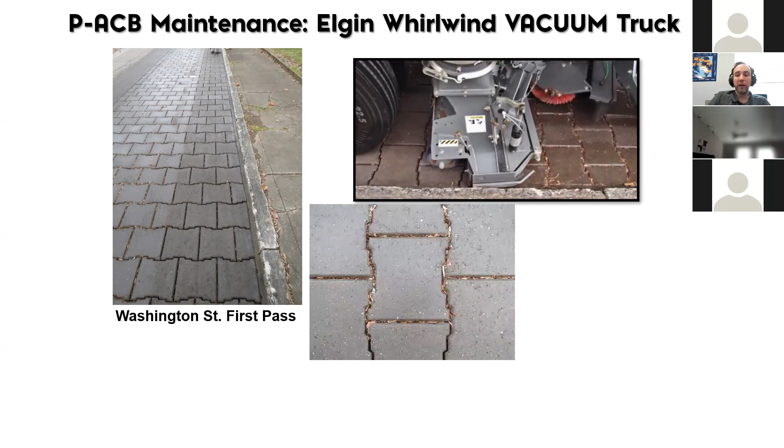So you can see here, this is actually an example of it done with an Elgin Whirlwind vacuum truck. You can see what it looked like when it was clogged, what it looked like after the first pass, and then after a few more passes, it's fully restored to its full depth. So anything that was in the material is now gone.

So this is just an or-equal kind of recommendation. You can see it gets as clogged as it gets, first pass, and then first pass does wonders. And then by the 8th pass, we've pretty much sucked everything that was in there out.

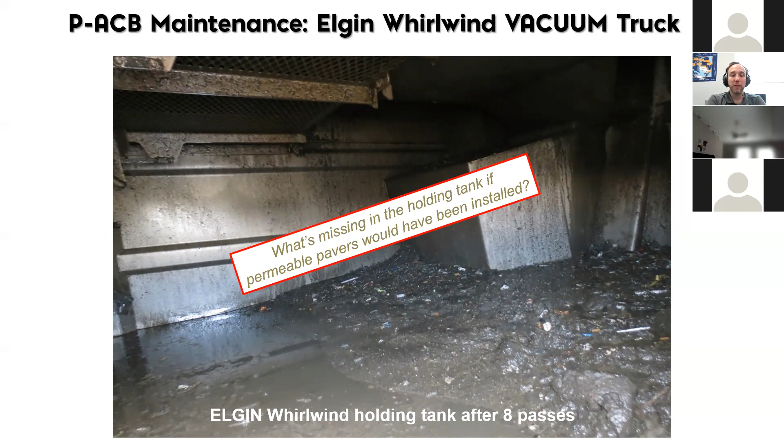I will note, because of the open joints, the water does follow the path of least resistance. So even when a system does look clogged, as it did when I went out with Montgomery County DEP, the system they maintain was still doing 400 inches an hour. A system that visibly was clogged was 400 inches an hour. After they did the maintenance, they were able to restore north of 1,000 inches an hour. They weren't even doing the right maintenance process that we recommended. They were just using an air knife to knock the debris out, but that was also knocking some of the debris further into the joints themselves.

You're asking other questions here as we come out of winter. What about salt? We don't recommend salt on these systems because ultimately the salt that you put there is going to end up back in the water supply. But we can tell you not to do that, doesn't mean that's what you should do. We recommend sealing the blocks. That effectively prevents the salt and corrosion that would occur with the blocks.

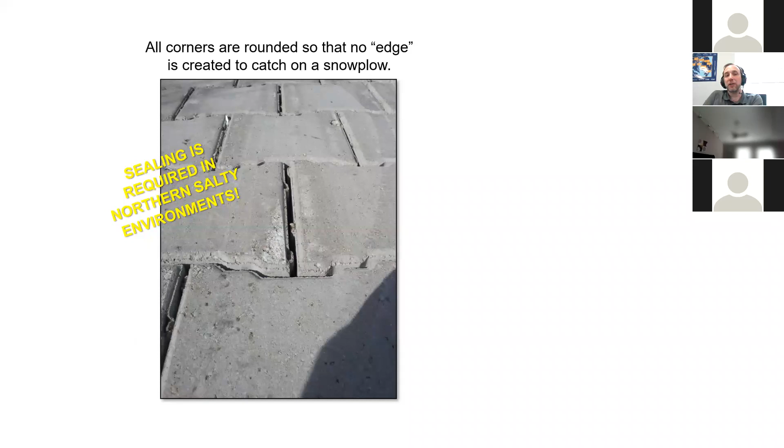The edges are chamfered, which avoids some of the catching of the snowplow. What you can see here is they can be effectively plowed without any issue, as you could see. So the blocks are pretty good in terms of handling this.

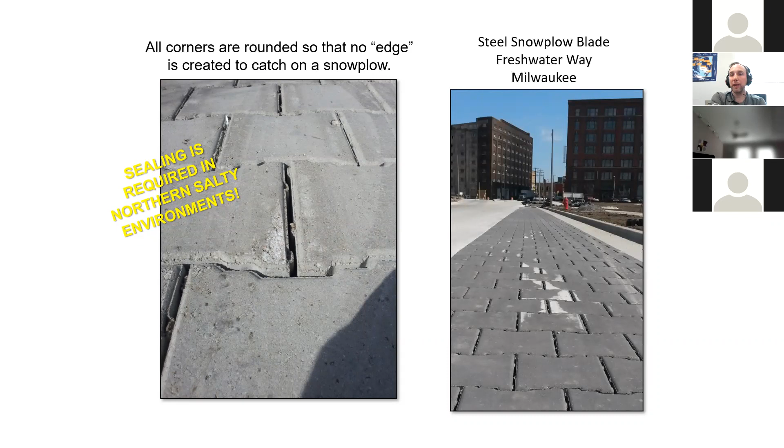Just some other benefits I like to stress here: you never have to replace the joint filler, so you never have to come back at the 1 month mark as you're supposed to with all traditional permeable interlocking pavers, or the 3 month mark. There's no joint to fill back in as it settles. Anything that's in that joint should not be there.

We have done north of 4 million square feet, a good chunk of that through the upper Midwest. We've never had any issue with freeze-thaw heaving or frost heaving. These systems have enough void space that as the water freezes, it occupies more of the void space, but it does not effectively compromise the system.

With our work down in Florida, we've actually seen a lot of interest in high water levels. They have sunny day flooding there. This system works effectively in reverse as well as it does going forward. It does not care which way the water is going. It is pretty agnostic to the water. It's used to living with water.

It began life as an erosion control system. So as you get the sunny day flooding, as the water level rises, it passes through all the pores and joints, and then as it subsides, it goes back. If that was a traditional concrete pavement, it would have cracked pretty badly.

The long lifetime of concrete, you're looking at 40 years or so. This can pretty much go as long as you need it to. A single person can replace one of these blocks. I regularly pull them out of sites to show folks. I'm happy to go out and meet you at a surface and show you an example system, but it takes about 10 seconds to pull one block out. If you needed to put the block back in, you just drop it back in.

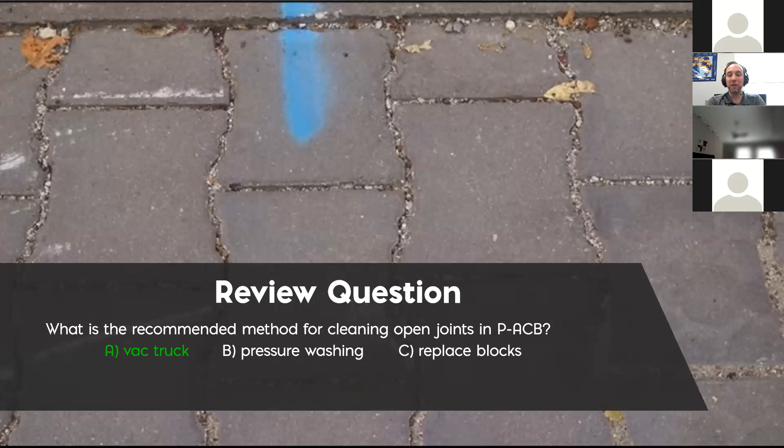In summary, it lowers the total cost of ownership over traditional permeable hard surfaces. I have some numbers I'll show you after this. It simplifies the maintenance, and even if you don't do the maintenance, it works really well. We have a no maintenance warranty for permeable pavement for any system we install that is purchased through Ernest Maier, which is quite impressive. I don't think there's anybody else who would warranty their permeable pavement.

It's really a strong stormwater management tool in your toolbox. It shouldn't be the only thing in your toolbox, bioretentions, swales, all those things are really important, but this is great to have because as soon as you need parking or a roadway, this is a way to not create the stormwater challenges you'd otherwise have. We've actually seen places take the water that falls on a roof and run their downspouts straight into the base to handle the water that way. So it's a great or equal alternative, and it's pretty much the only alternative you could use in high traffic right of way or slope situations.

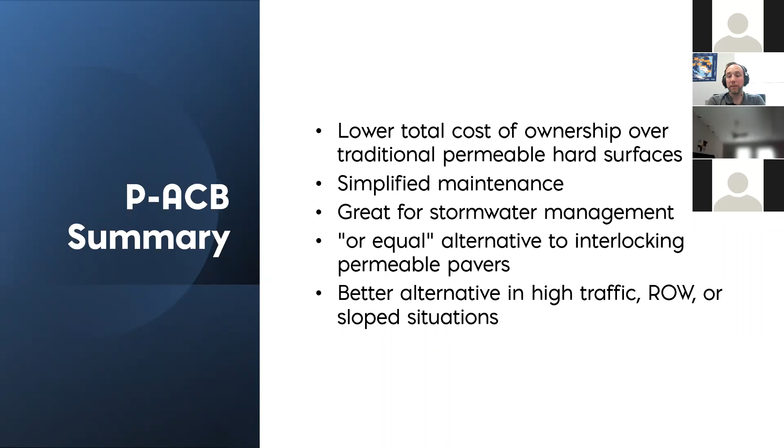If you're not thinking about a P-ACB system, you should be. It paves, it drains, and it also stores your water. And it's not something you're going out on a limb with. We've installed these systems for 15 years now, and done north of 4 to 5 million square feet nationally. So this is really not a system that is new or novel. We really wish other people would copy us and use open joints, but they are reticent to do that.

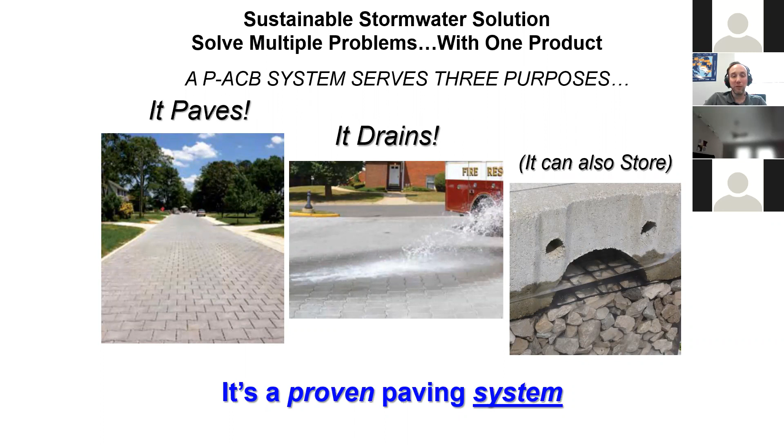Just some other resources you can have: we have an infiltration calculator. So if you're the kind of person who likes to ask, will it work? We built a calculator just for you. It's a nice, fun tool. You select and put in the zip code for the project you're working on, and it'll give you the actual rainfall from the NOAA Atlas 14. The NOAA Atlas will tell you what the 10-year event, the 100-year event, the 1,000-year event looks like, and you can see whether or not PaveDrain would be able to handle that.

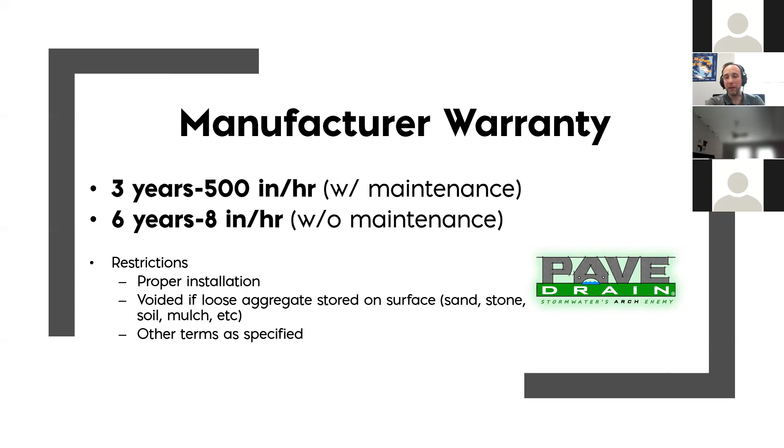When you're comparing that to PaveDrain, it really competes on a price basis, on a price-per-square-foot basis, with conventional asphalt or conventional concrete, where you do have to put in stormwater assets with it.

So that's my last thing, I'll leave that up there. I'm happy to address questions, so if folks have some, let me see what I've got here.

Patrick asked the first question: what are the requirements for the base and subgrade design? So it depends on the jurisdiction you're operating in as to what they would allow. We have seen these systems effectively work in all types of soils, A through D.

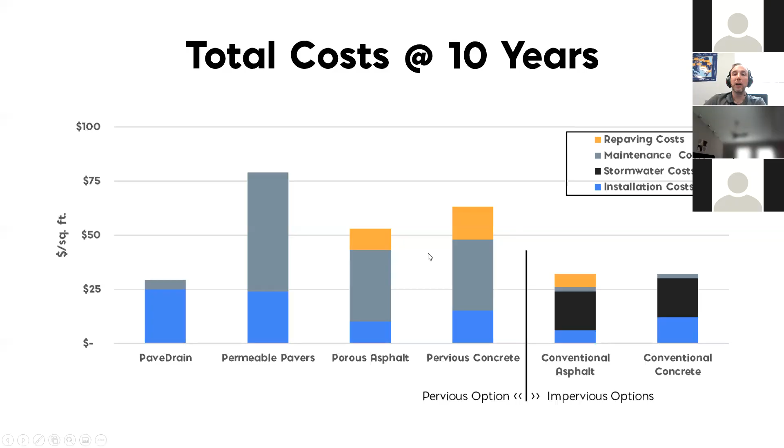This particular job in Colmar Manor, I actually have a slide there. We did the soil testing after we dug everything out. It is clay soil, Class D soil by all definitions. But as you can see, it was performing in a soil class significantly above what should be expected.

So we are working with the University of Maryland to help recognize how the systems are actually performing. We've actually been able to get almost a near blanket exemption from Wisconsin's DNR, who is equally as tough as Maryland's Department of the Environment, in terms of allowing the system anywhere.

In terms of the base design, is there any other requirements? We recommend bedding it on 57s for 4 to 6 inches. Anything deeper than that, we recommend number 2 stone.

We have done systems as deep as about 10 feet. Obviously, you get 10 feet of space to store water at 30 to 40% void space, so there's a lot of volume to store water. Obviously, that is a tough way to attack the issue.

It is approved by MDE as traditional permeable pavement, so you can use this in lieu of traditional permeable pavement. Unfortunately, one of the challenges when you do it that way is you have to follow the guidance of traditional interlocking concrete paver. But what you do gain is you still gain in terms of maintenance and performance.

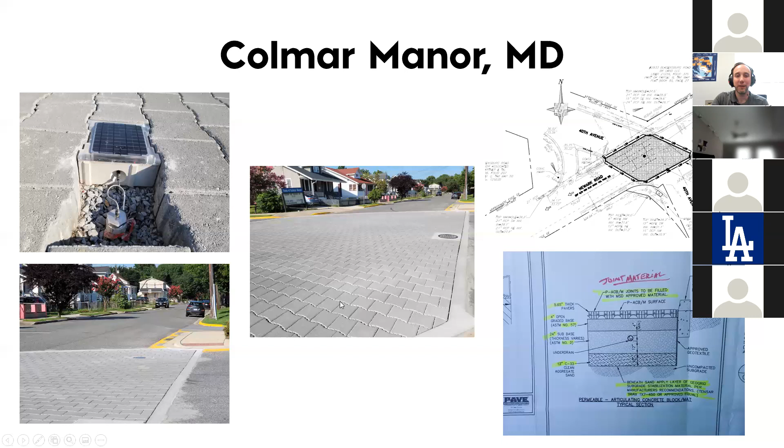Really, the critical thing for you guys as architects to take away is here's another tool in your toolbox. The right-of-ways, the drive aisles, turn loops, all of that can be handled with permeable pavement now. You can also create a system that requires significantly less maintenance, so the owner isn't experiencing any of the challenges that stormwater regulations exist to address. This is the best way to handle it. With that, I will stop talking.